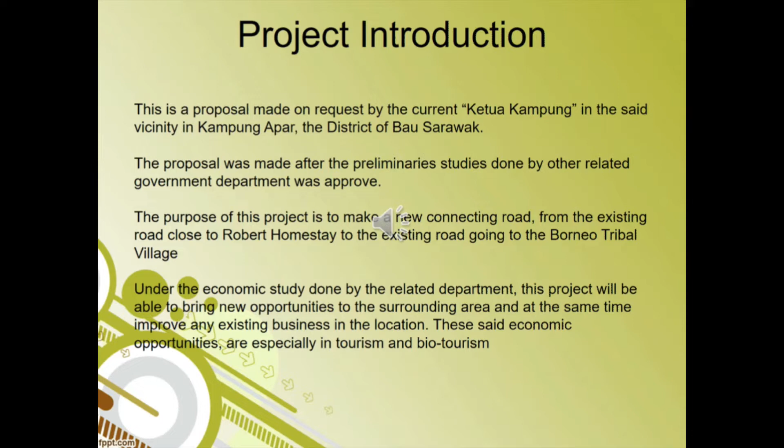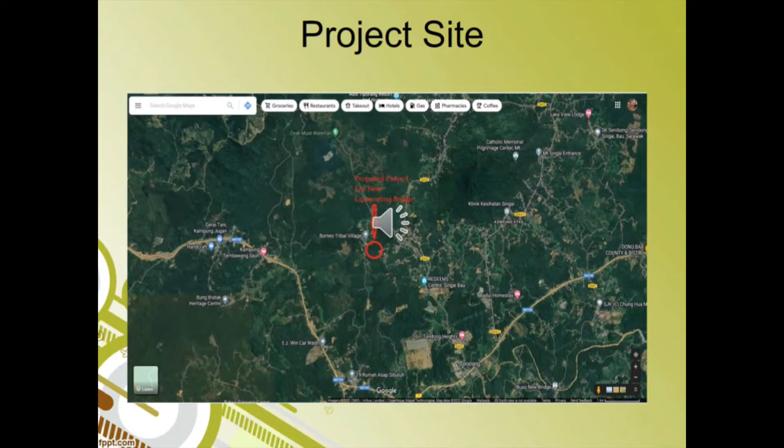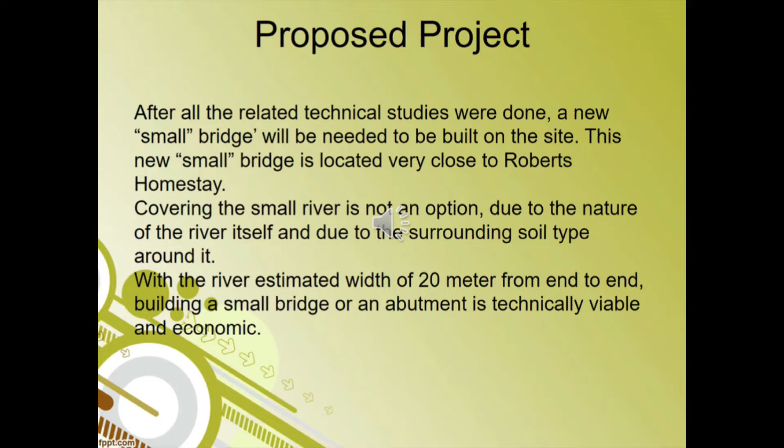This is where the proposed project for the new connecting road and the connecting bridge is to be built. After studies were done, not only on the soil condition but also on the vicinity around the river, which is around 15 to 20 meter width, the best option is to build a new bridge. From there our team continued to make design for a new bridge together with the foundation and all the abutment design.

From this map we will get some idea where to build a bridge and also how the road will be built.

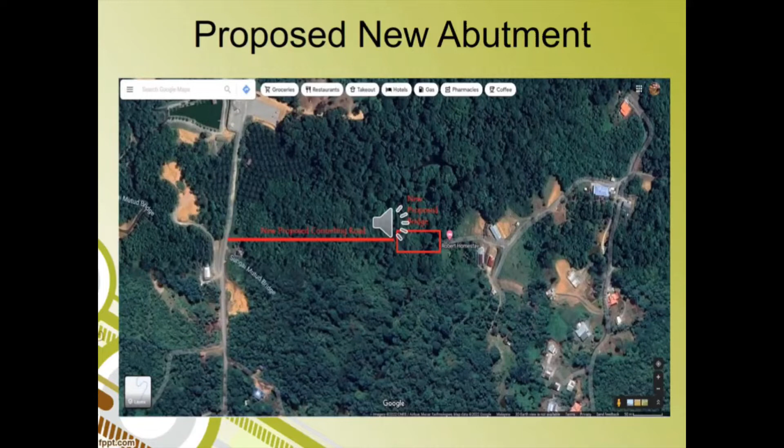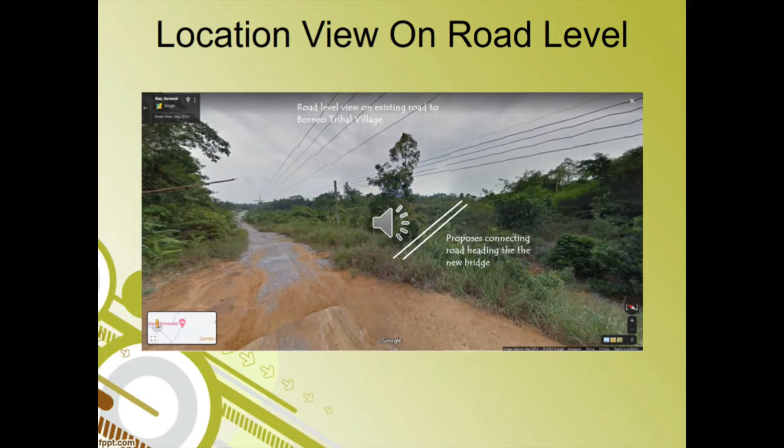These are pictures taken on road level at the Borneo Tribal Village road, heading towards Borneo Tribal Village, and there are 2 lines there. The 2 lines are the proposed connecting road, showing the orientation of the road. And this is another road level picture taken just to give us an idea where it's heading, and in this picture it's heading towards the Borneo Tribal Village.

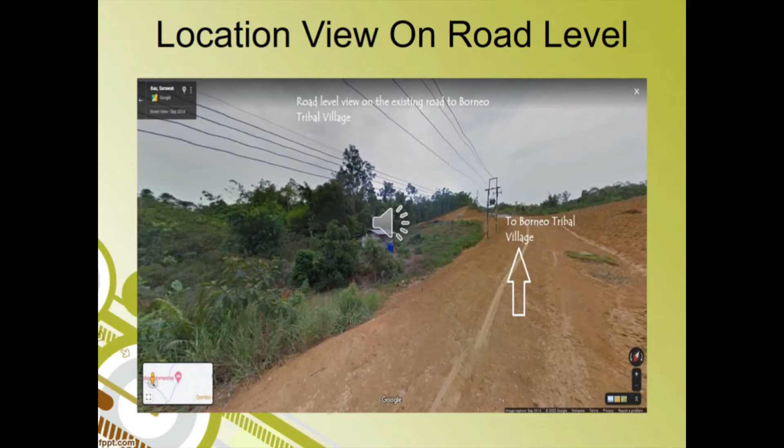And that concludes my presentation for the introduction and background of our project site. The next presentation will be on the soil profiling. Thank you.

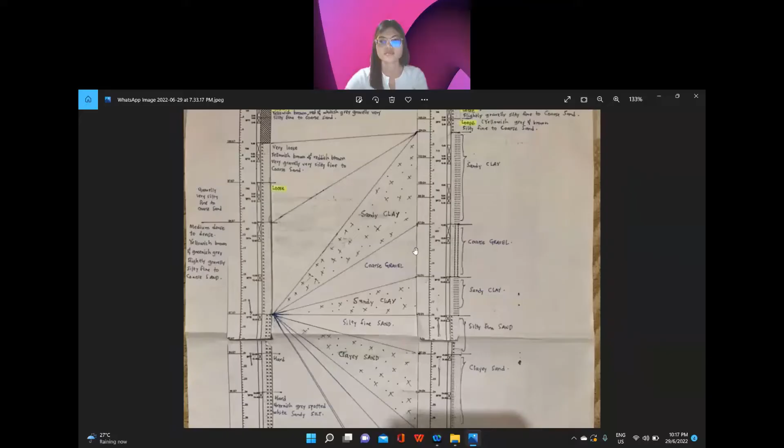As we can see in the figure above, the ground level of the soil surrounding BH number 2 and BH number 4 mostly consists of silt with sand and gravel. Silty soil can be smooth to the touch and retains water longer because of its smaller particles. However, because of its tendency to retain moisture, it is cold and drains poorly. This type of soil is light, moist, and has high fertility rates, which is close on the ground level.

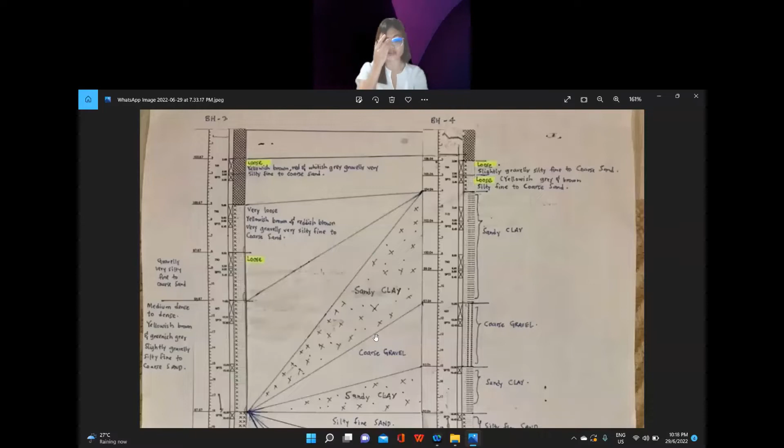The silt soil is also of medium-sized particles that are well drained and can hold moisture very well. The next layer, 5 meter to 18 meter below the ground level, consists of coarse sand at BH number 3 and sandy clay under the layer near BH number 4.

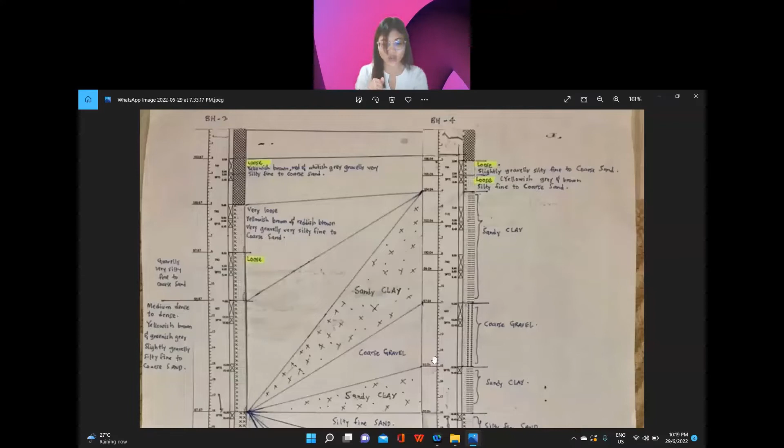Clay is made up of tiny particles, so it stores water well. But because of its tight grasp on water, it expands greatly when moist and shrinks significantly when dry. When clay is moist, it is very pliable and can easily be moved and manipulated. These extreme changes put a great deal of pressure on foundations, causing them to move up and down, and eventually crack, making clay a poor soil for support.

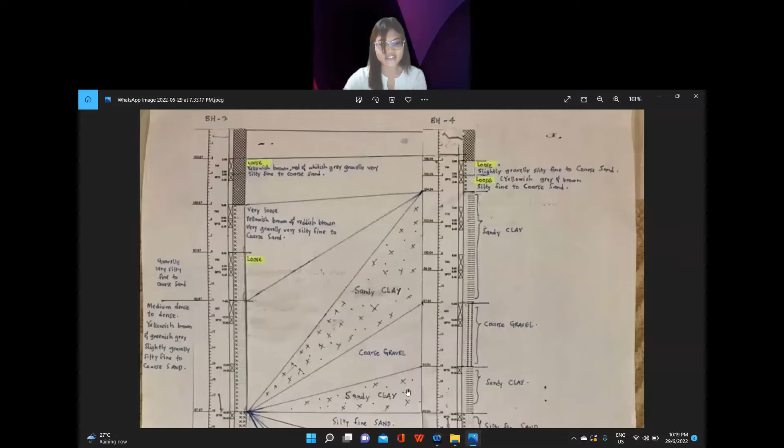After that, from 18 meters to 30.3 meters is a hard layer, which consists of greenish, gray, spot white sandy silt at BH number 3, while at BH number 4, there is slightly silty fine sand with gravelly clay, sand to silty fine coarse sand.

Sand or gravel has the largest particles of the different soil types. It is dry and gritty to the touch and does not hold moisture because of the large openings, but drains easily. When compacted and moist, it holds together fairly well, and if compacted, they make good soil to support a foundation because of their non-water retaining properties.

However, when moist, the particles will lose their friction and can be washed away, which can leave gaps beneath the foundation. This layer is heavy soil that benefits from high nutrients.

So, in conclusion, this type of soil is silty sand, which has heavy particles. Due to the presence of heavy particles, the particles are loosely packed, leaving large space for air. Since there is a lot of space for the air to get filled, they are unable to hold water and the water gets easily drained.

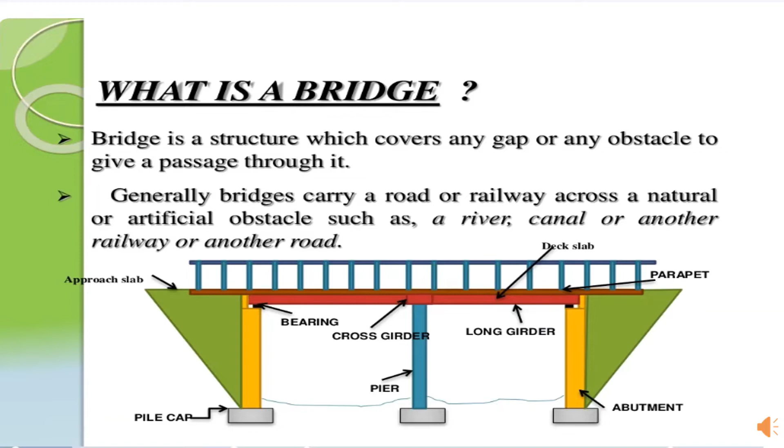For everyone's information, a bridge is a structure which covers any gap or any obstacle to give a passage through it. Generally, a bridge carries a road or railway across a natural or artificial obstacle such as a river, canal, or another railway or another road. What is foundation?

A foundation is the part constructed under the pier or abutment and over the underlying soil or rock. The loads transmitted by the foundation to the underlying soil must not cause soil shear failure or damaging settlement of the superstructure.

The foundations of a bridge are particularly critical because they must support the entire weight of the bridge and the traffic loads that it will carry.

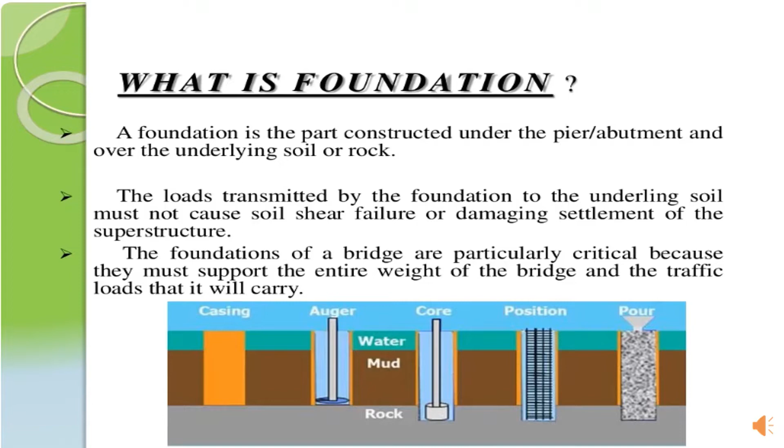The purpose of foundation is to distribute the load of the bridge over a large bearing area and provide stability of the bridge against settlement and tilting. It is provided sufficiently deep so that it is not affected by scouring.

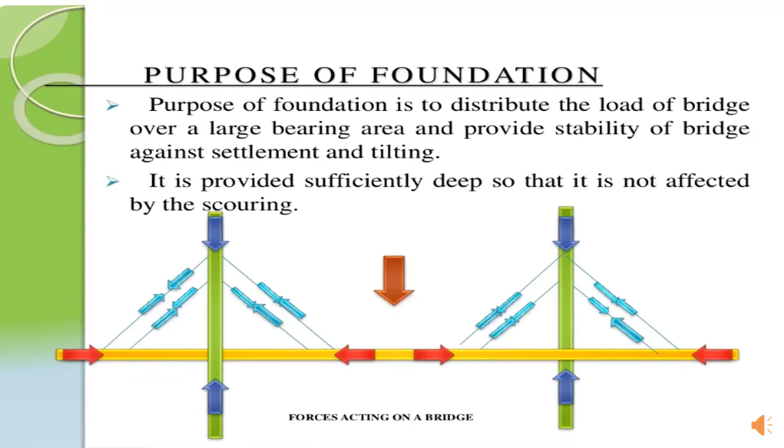Types of foundations. The type of foundation is designed when subsoil data of the bridge site is obtained. The different types of foundations for bridges are given as follows: shallow foundation, spread foundation, and raft foundation. For deep foundation, it is pile and well foundation.

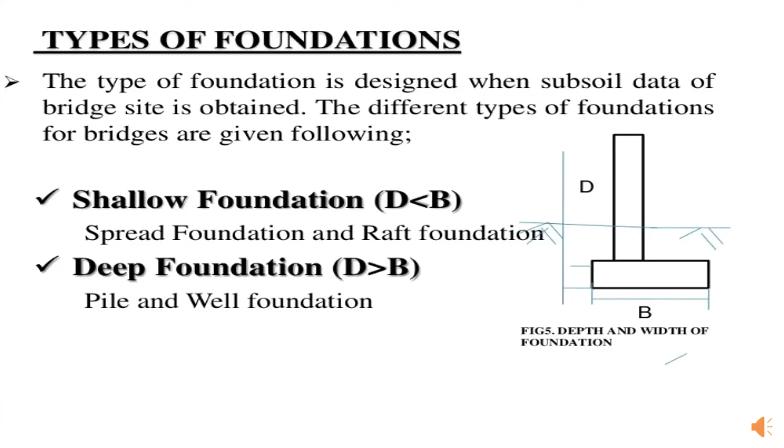Shallow foundation. A shallow foundation is sometimes defined as one whose depth is smaller than its width. A shallow foundation can be laid using open excavation by allowing natural slopes on all sides. This is normally convenient above the water table and is practicable up to a depth of about 5 meters. Shallow foundation transfers the load to the ground by bearing at the bottom of the foundation.

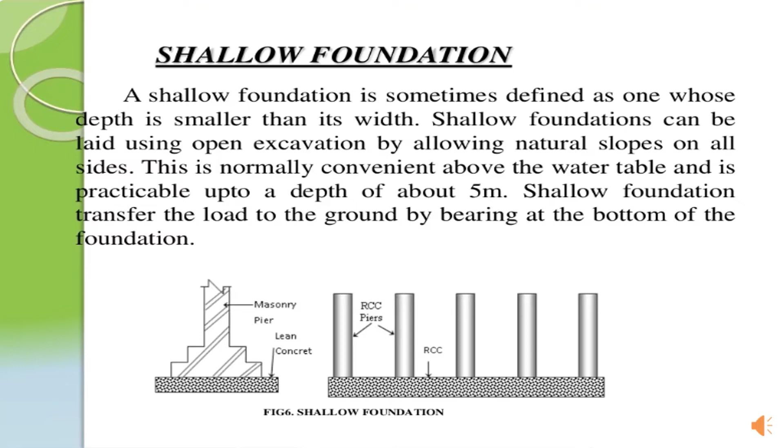Deep foundation. A deep foundation is defined as one whose depth is larger than its width. Deep foundations cannot be laid using open excavation. Deep foundation transfers the load to the ground, partly by end bearing at the bottom of the foundation and partly by skin friction with the soil around the foundation along its embedment in the soil.

Piles are preferred over wells as they are more economical than wells.

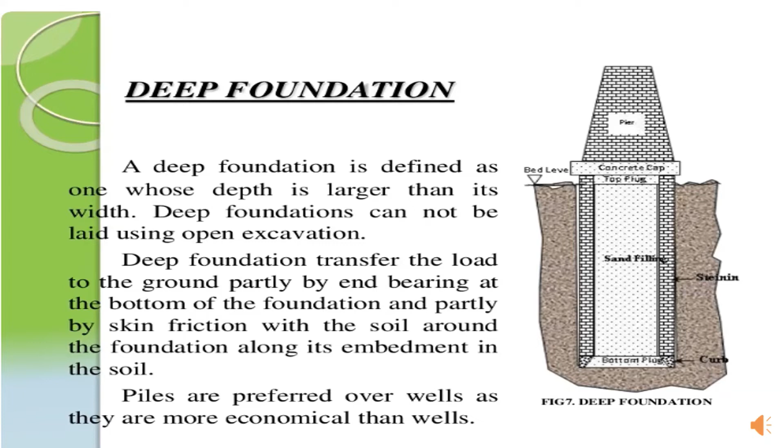Pile foundation. The use of pile foundation has till recently not been a popular choice for bridges. For road bridges, this has been used mostly as timber pile for temporary bridges and where subjected to lighter loads. RCC piles, both precast and cast in situ, as well as larger diameter bored piles below bed level are becoming popular. A minimum diameter of 120 mm for river bridges and 750 mm for others is preferred.

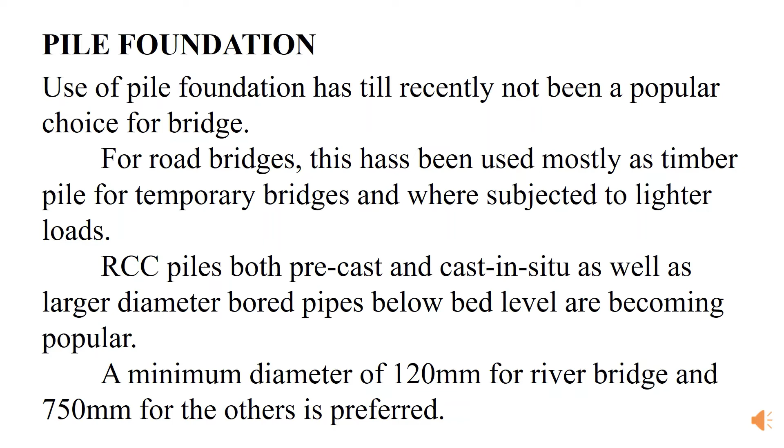As you can see, this is the diagram of the foundation. This is the real image for clear views of the foundation.

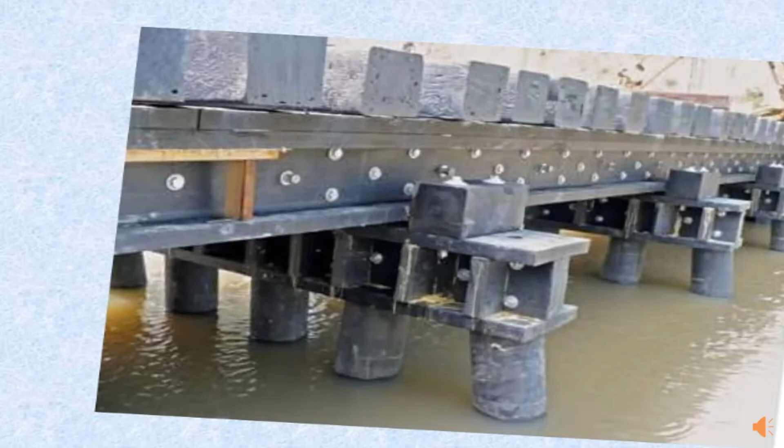Well foundation. Well foundations are constructed on dry ground in suitable form and then sunk into the ground to the desired level by grabbing the soil through dredge holes provided, surrounded by the solid masonry. The diagram shows the well foundation for your viewing.

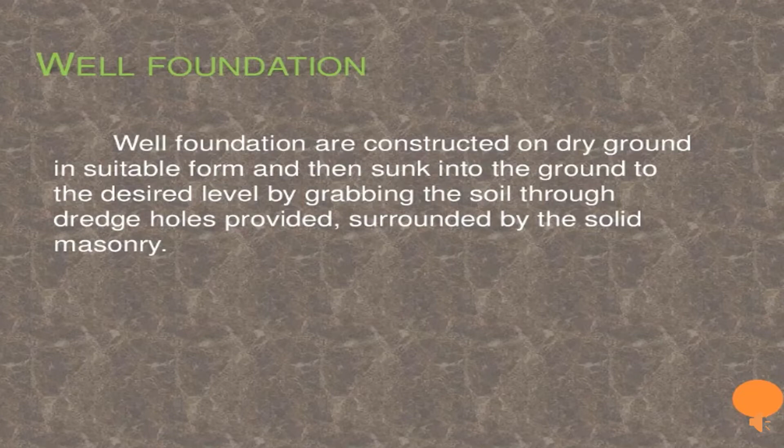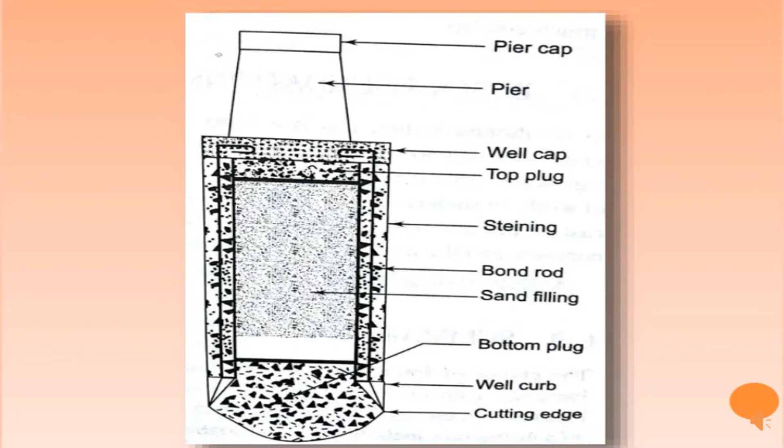Well foundation: the component of well foundation. First, the well curb. The structure of well at the bottom is tapered to end in a steel cutting edge which facilitates cutting through soil for sinking of well. This tapering portion being thin, it has to be strengthened suitably to take up the heavy loading. This portion is called well curb.

Second, steining. The structure in the form of wells surrounding the dredge hole is known as steining. Third, bottom plug. The concrete placed at the bottom to form the base of foundation for distributing the load to soil below is known as bottom plug. Fourth, top plug. The concrete placed at the top at finishing level to transmit the load of structure to the well steining is known as top plug.

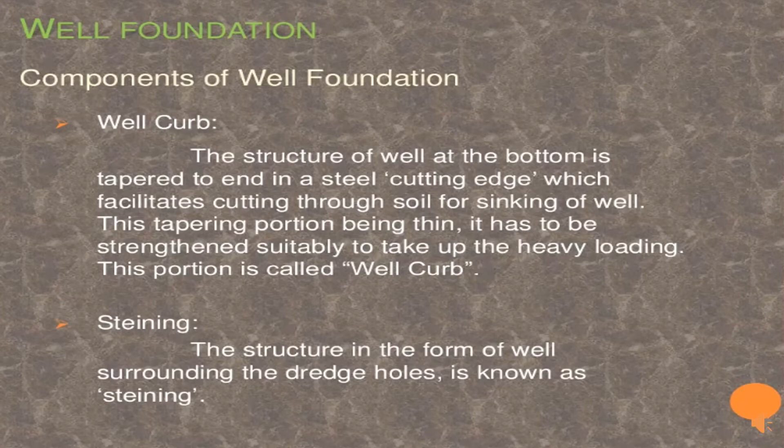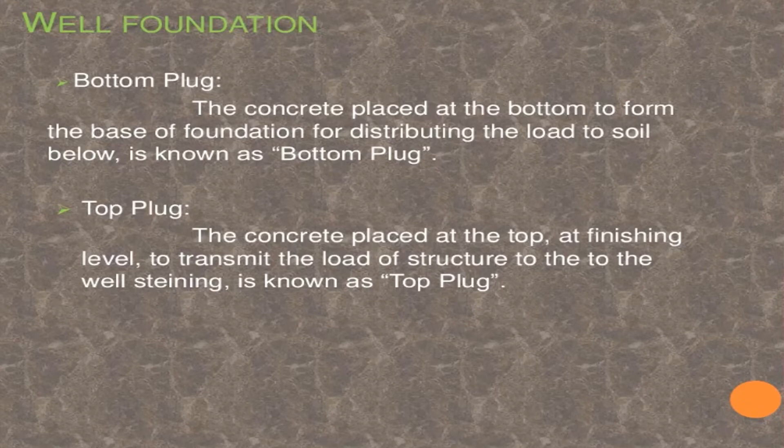The advantages of well foundation: First, this provides a solid and massive foundation for heavy loads and high horizontal thrust transmitted by moving loads. Second, this has a larger cross-sectional area and hence the total foundation bearing capacity is much larger than piles. Third, wells can be taken through soil having boulders, logs of wood, and such type of obstruction without causing damage to the structure. The fourth advantage is the steining of well can be done in dry condition.

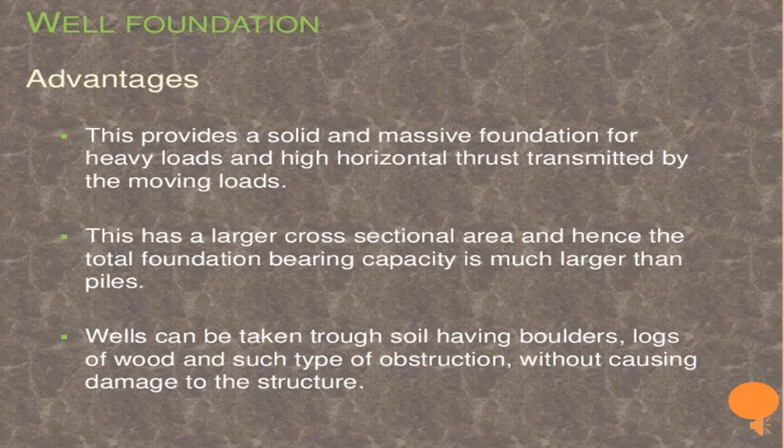Hence quality of masonry or concrete can be assured. Fifth, the well provides good grip when taken sufficiently deep and hence is more suited to the river bed subjected to heavy scour. Hence, the choice is mostly in favor of well foundation where large spans requiring deep foundation has to be provided.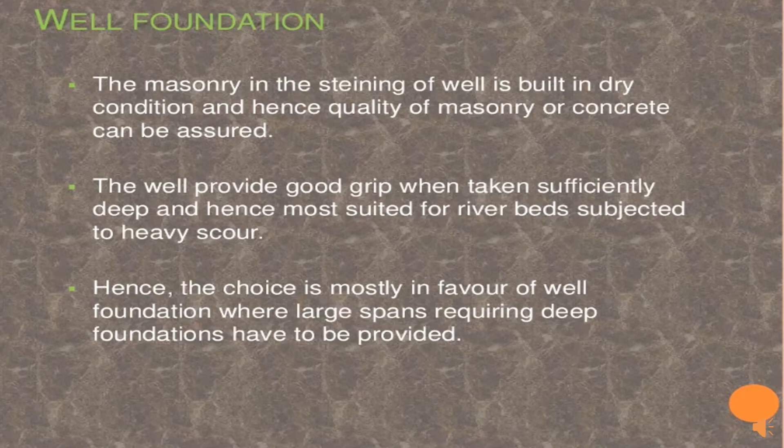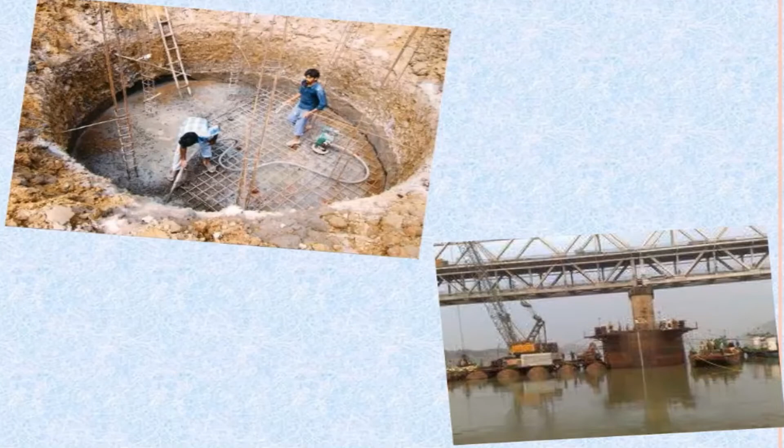Block foundation. It is a form of shallow foundation used for small bridges in locations where there is a good founding strata at shallow depth, but is overlain by a very soft layer of soil and high water table, making open excavation difficult due to small quantum of work.

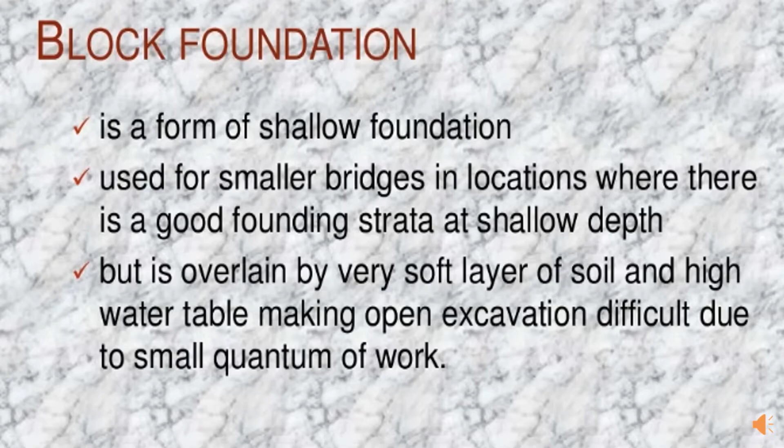For site selection, ideal characteristics of bridge site: First, suitable, unyielding, non-erodible material for foundation should be present at short depth for piers or abutments. Second, the bearing strata should be free from the tendency to slip, slide or sink under load.

Third, the stream at bridge sites should be well defined, as narrow as possible. Fourth, there should be a straight reach of stream at the bridge site. Fifth, the site should have firm, permanent, straight and high banks. Sixth, the flow of water at the stream at the bridge should be steady.

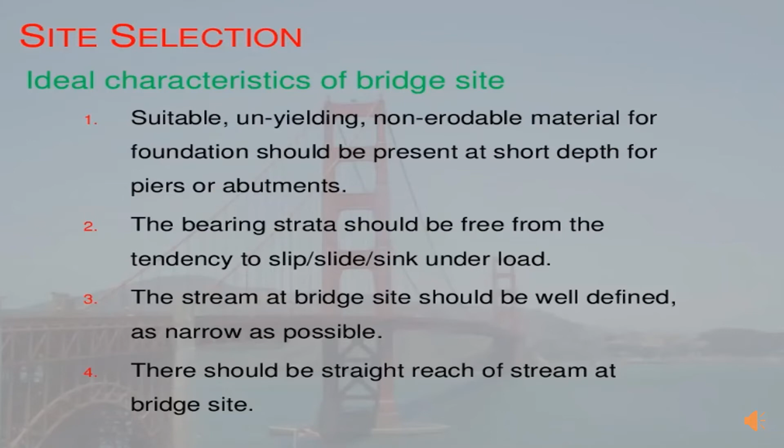Seventh, it should be feasible to have a straight approach road and square alignment. Eighth, there should be minimum obstruction of waterways so as to have minimum afflux. Ninth, there should be no need for costly river training works in the vicinity of the bridge site.

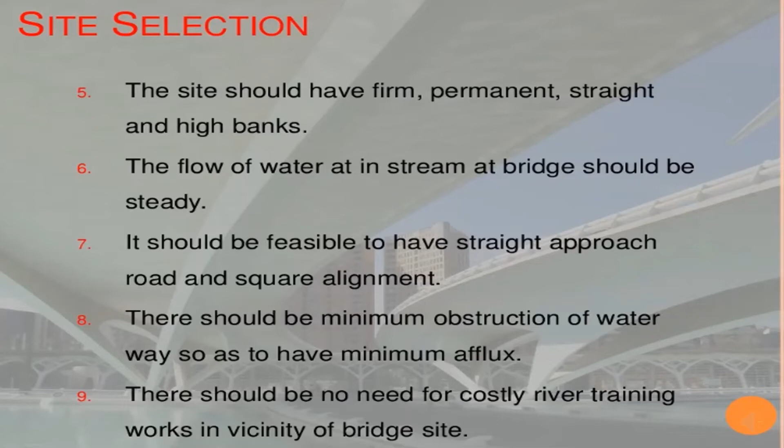Tenth, at the bridge site, it should be possible to provide secure and economical approaches. Eleventh, in order to have minimum foundation cost, the bridge site should be such that no excessive work is carried out inside water.

Twelfth, in order to achieve economy, there should be easy availability of labor, transport facilities, and construction material in the vicinity of bridge site. Thirteenth, there should be no confluence of large tributaries in the vicinity of bridge site.

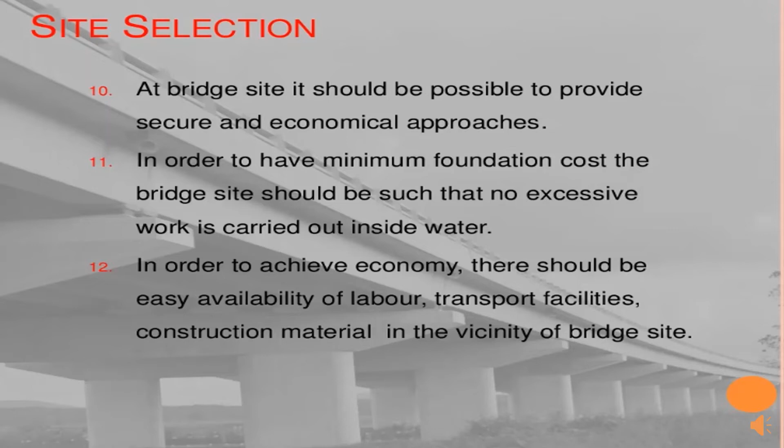In case of curved alignment, the bridge should not be on the curve but preferably on the tangent, since otherwise there is more probability of accidents. Finally, the bridge site should be such that adequate vertical height and waterway is available underneath the bridge.

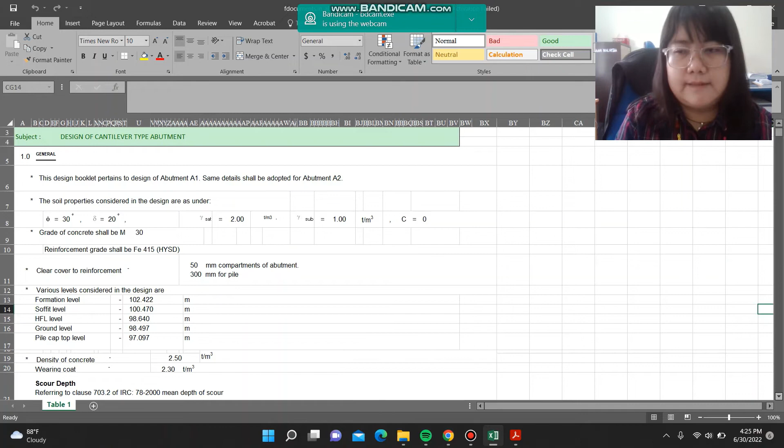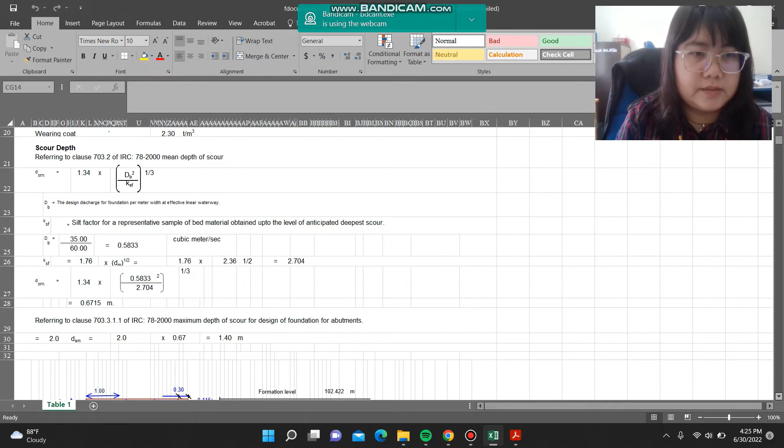We have for that also the depth of scour, which is 0.6715 meter for the calculation, but referring to clause 703.3.1.1 of IRC 78/2000, maximum depth of scour for design of foundation of abutment is equal to 1.4 meter.

This is a drawing. Next, the calculation for the dead load, and this is the general item that needs to be considered.

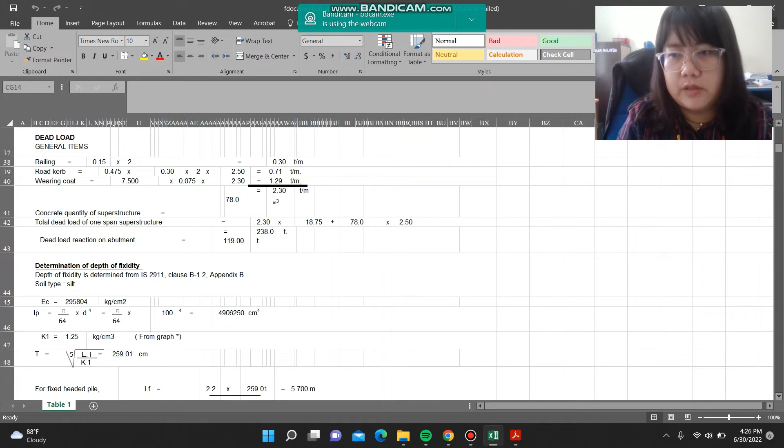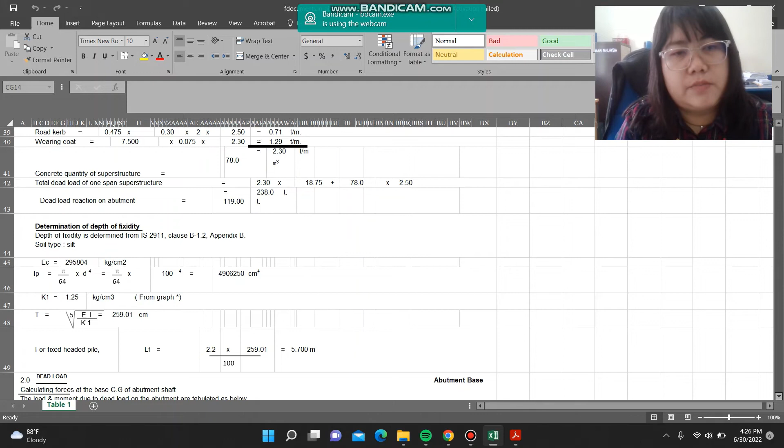We have the determination of depth of fixity, which is determined from IS 2911, clause B-1.2, appendix B, and the soil type is silt. For the fixed headed pile, we have 5.7 meter.

Next is the dead load, the calculating forces at the base CG of abutment shaft, and the load and moment due to the dead load on the abutment are tabulated as below. This is the calculation for the vertical load and for the moment. The subtotal can be seen on the screen.

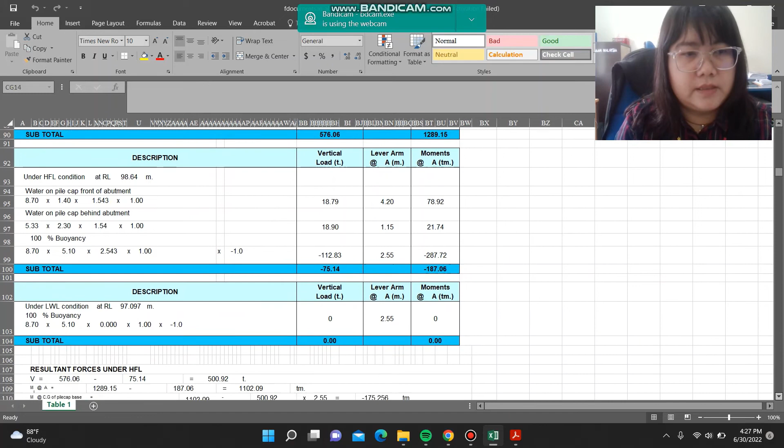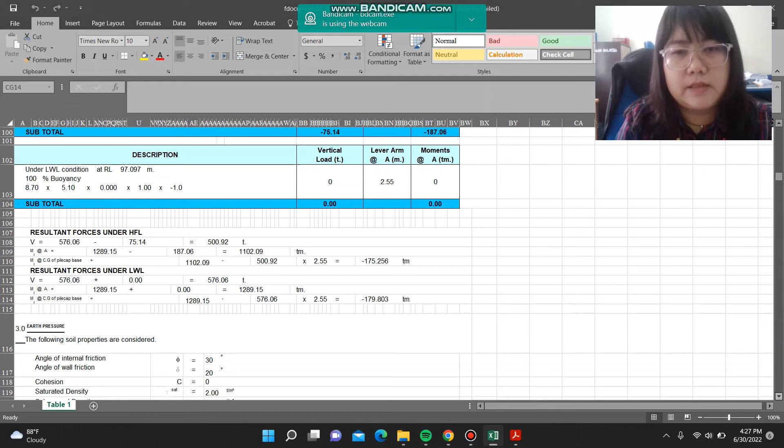This is the calculation for the under HFL condition and also under the LWL condition. For the resultant forces under the HFL is equal to negative 175.256, while for the forces under the LWL we have negative 179.803.

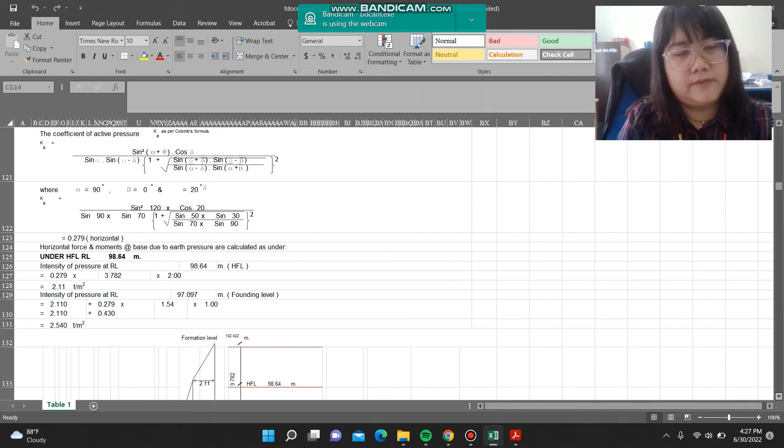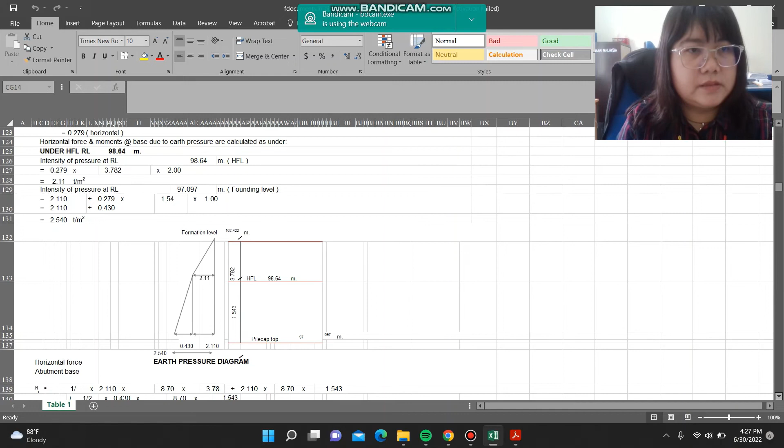Next is the earth pressure. So this is the soil properties that need to be considered. So for the coefficient of active pressure, we have 0.279 for the horizontal. And then the calculation for the horizontal force and moment at base due to earth pressure, we have the intensity pressure at RL, at the HFL, and the founding level. And this is the earth pressure diagram.

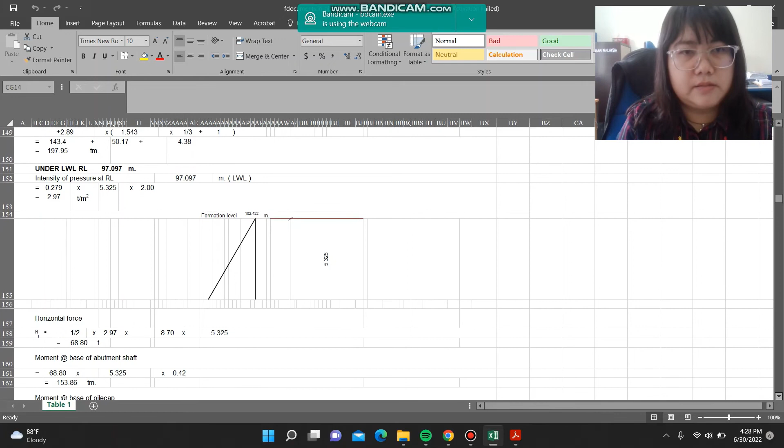Next is the calculation for the horizontal force for the abutment base, the moment for the abutment shaft and the pile cap, and also the intensity pressure at RL. This is the drawing. And we have the horizontal force, the calculation for the moment for the abutment shaft and the base of pile cap.

Next is the dynamic increment of earth pressure. The assessment of earth pressure shall be calculated as per IRC 6/2010. This is the flexibility factor that we need to consider. So for the horizontal seismic coefficient is 0.144, and the vertical seismic coefficient we have 0.072.

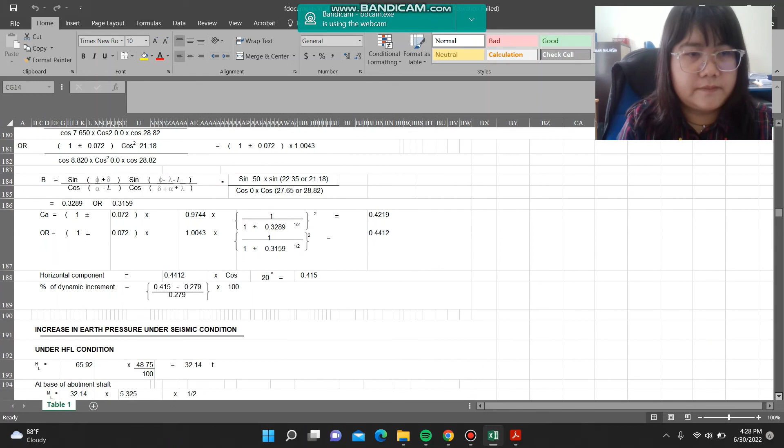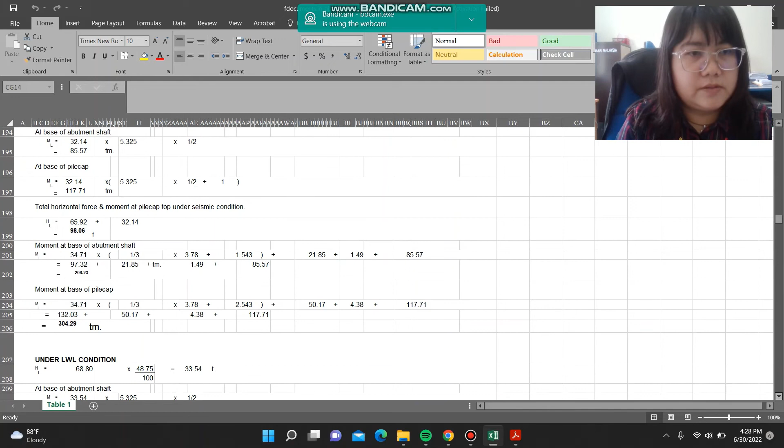Next is the increase in earth pressure under seismic condition. Under the HFL condition calculation, for the abutment shaft and the pile cap, horizontal force at the abutment shaft and the pile cap, and then for under LWL condition calculation.

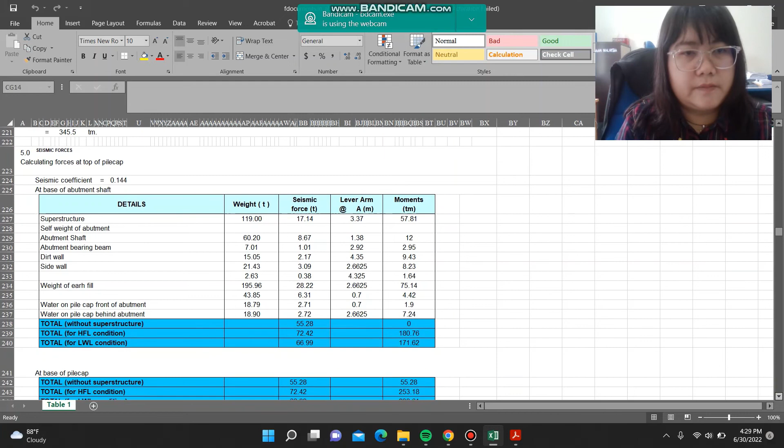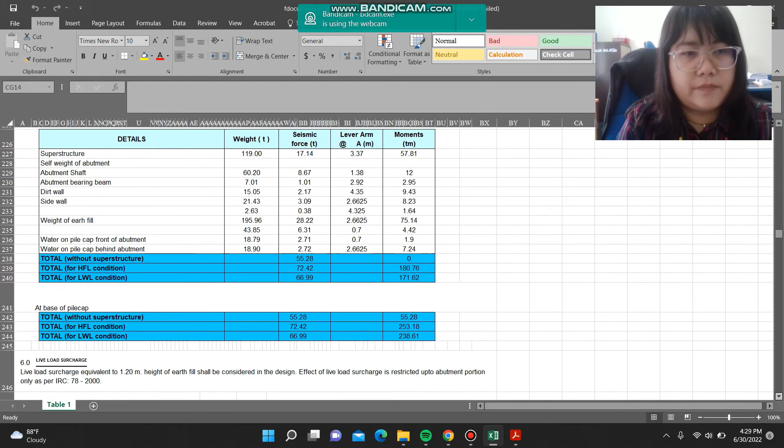Next is the seismic forces. This is the calculating forces at top of pile cap, and we're using the seismic coefficient for the horizontal, which is equal to 0.144. This is the calculation for the seismic force and the moment, the total for the without superstructure for the HFL condition and LWL condition. Also for the base of the pile cap, total for the load and the moment.

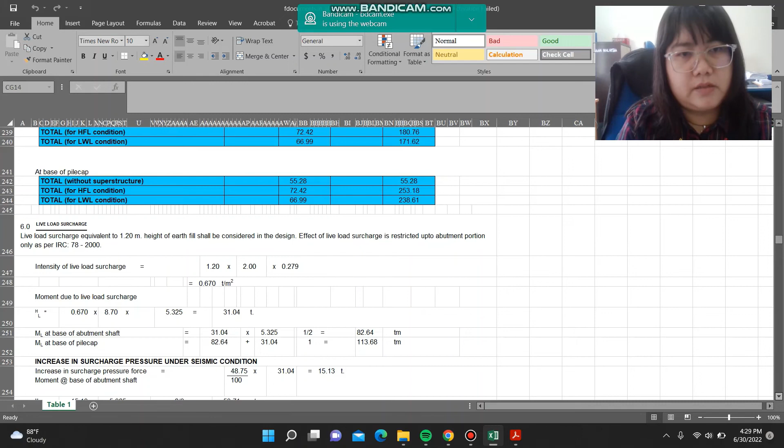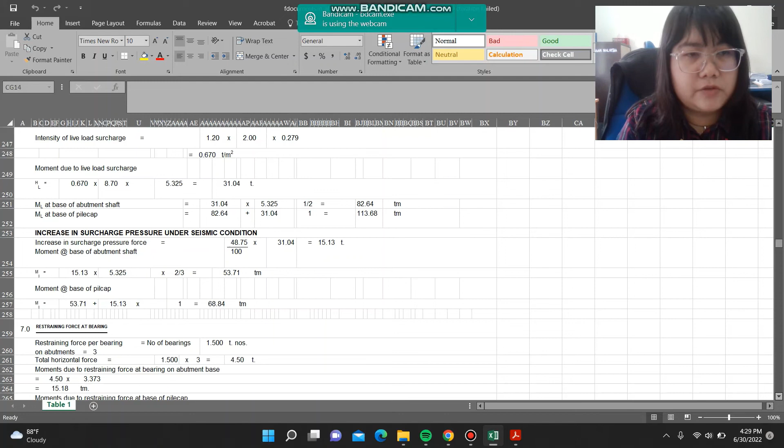Next is the live load surcharge, which is equivalent to 1.2 meter, and the height of the earth fill shall be considered in the design. So the increase in surcharge pressure under seismic condition. We have the increase of surcharge forces, which is 15.13, moment at the abutment shaft, and lastly the moment at the base of pile cap.

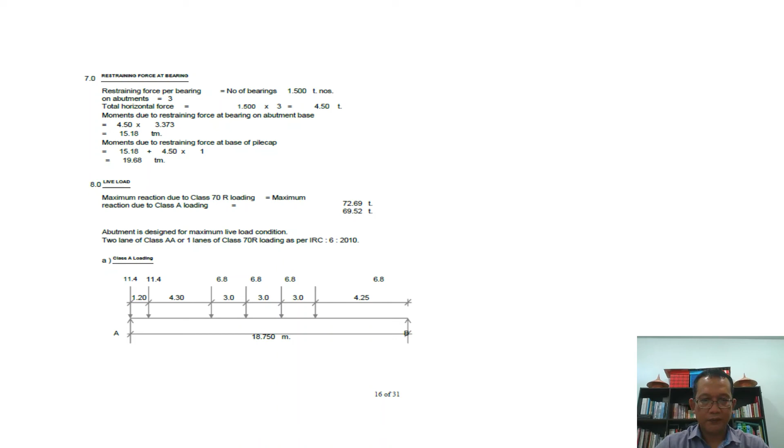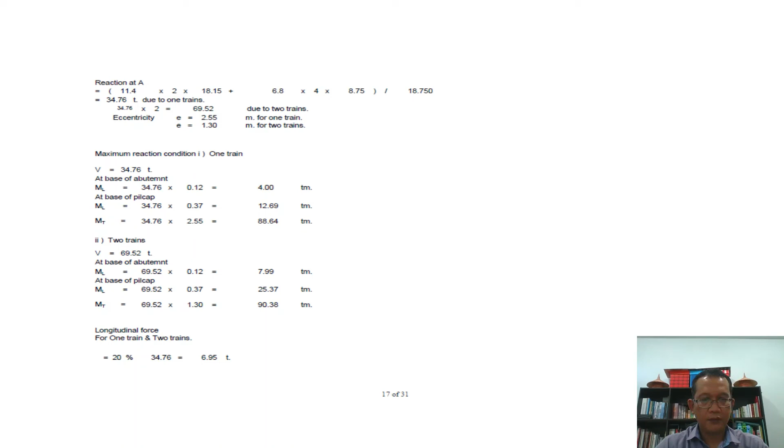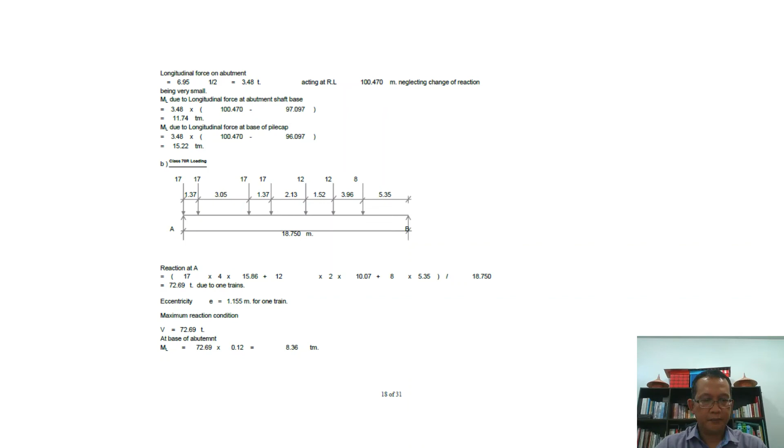Here is the calculation for restraining force at bearing. We're also looking for the live load. So the live load and the class of loading also. So next we also check on the maximum reaction condition of 1 train, 2 train, so next we also check loading for the class 70R. This is the diagram showing the loading. Then here is the longitudinal force for 1 train.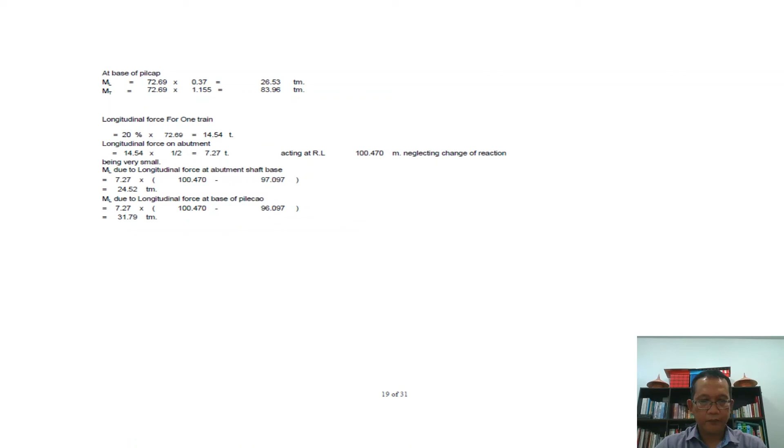Okay, next step is we summarize the force on the base of abutment shaft. Okay, from this table we can see that showing the loading for the live load for class A, class 70R, earth pressure, live load surcharge, restraint force at bearing, and seismic.

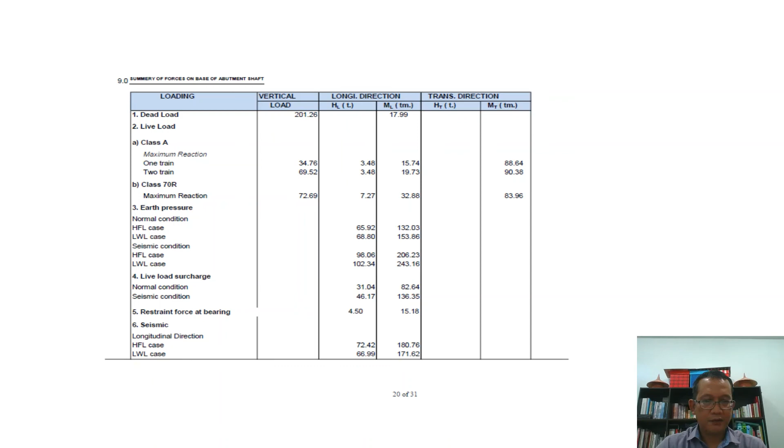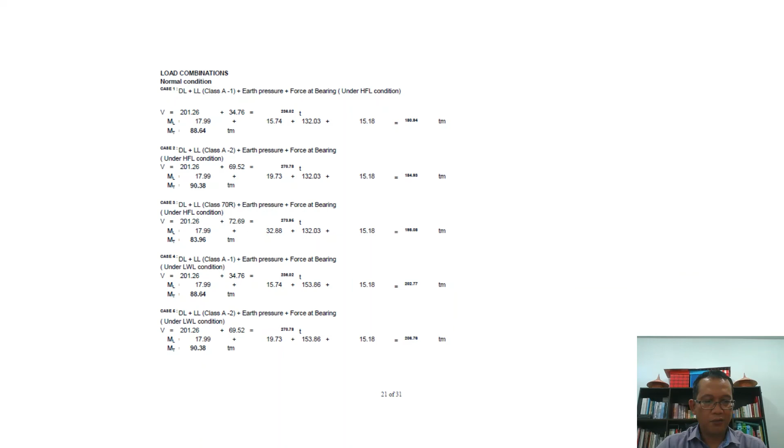Next, we check on the load combination. Okay. We will check normal condition according to the few cases. So we will calculate all these load combinations until the case 8. Then we also check on the seismic condition. Also, we consider until 8 cases.

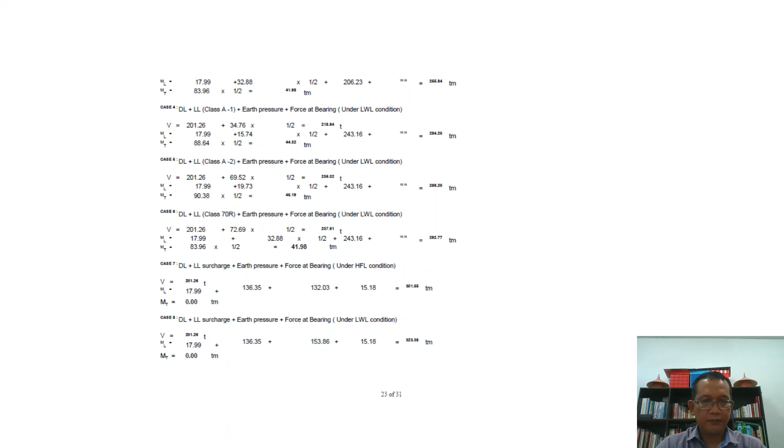Next step is a summary of force on the pile cap base. We will check on loading for the dead load, live load, earth pressure, live load surcharge, the restraint force at bearing, and also this is the same as the summary for the base of the abutment shaft system.

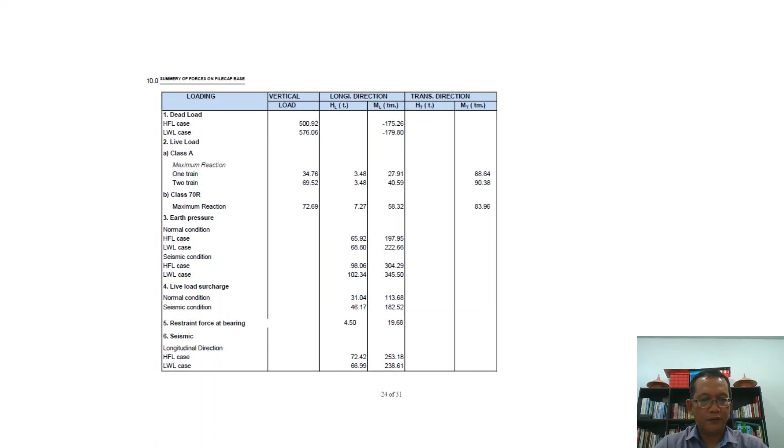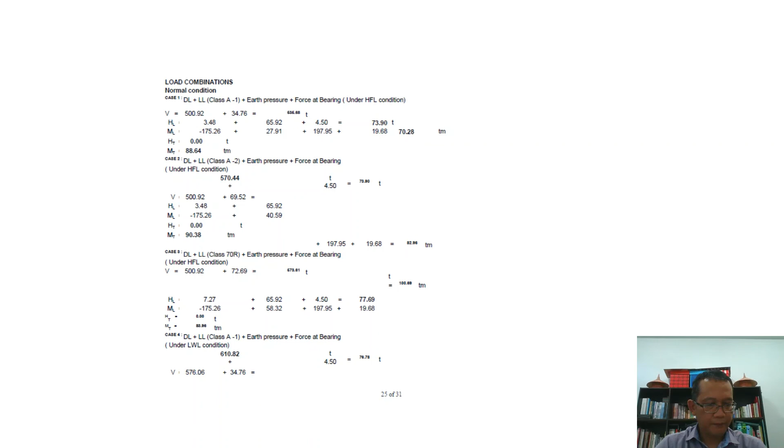We also check on the load combination again from the normal condition with 8 cases. Okay, and also the seismic condition, we also check again the combination. Based on these cases, we check until the 16 cases.

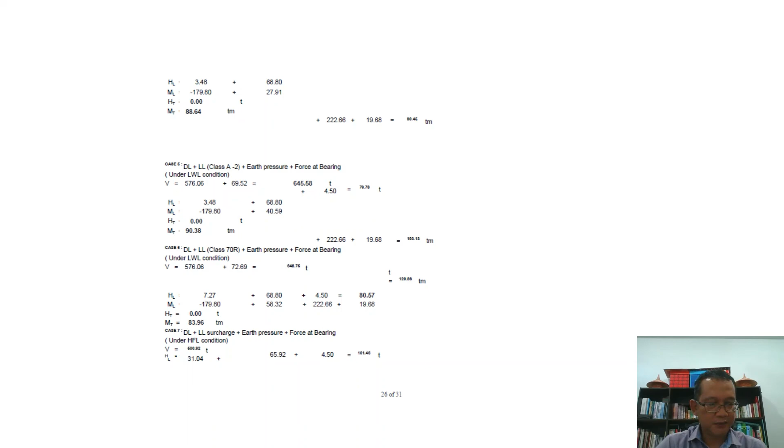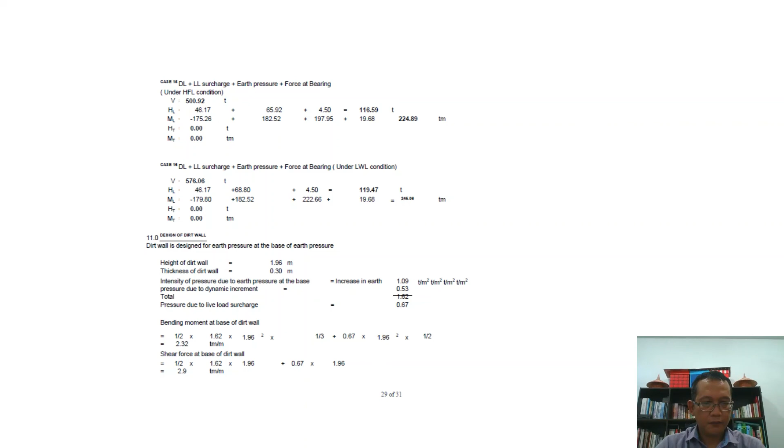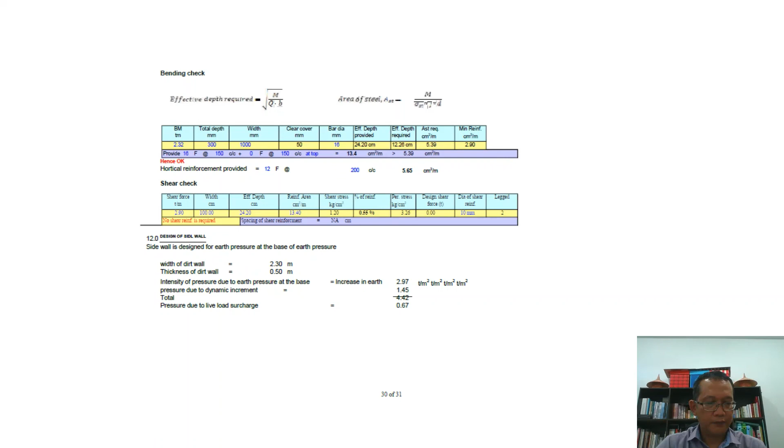Then we go to the design of the dirt wall. Dirt wall is designed for earth pressure at the base. Then we will check on the bending and also the shear, moment, shear force. After that, we also check the design for the side wall. And again, we do the checking for the bending moment and also shear checking.